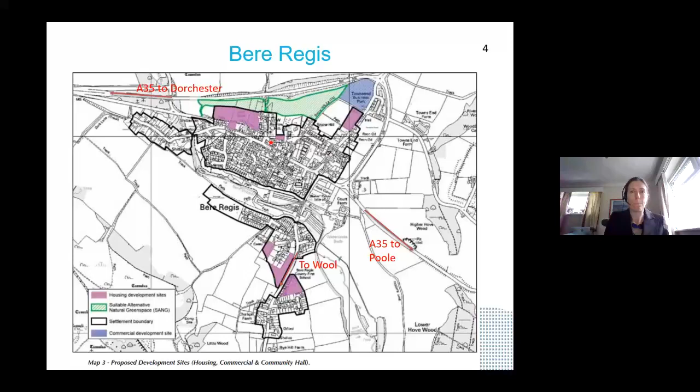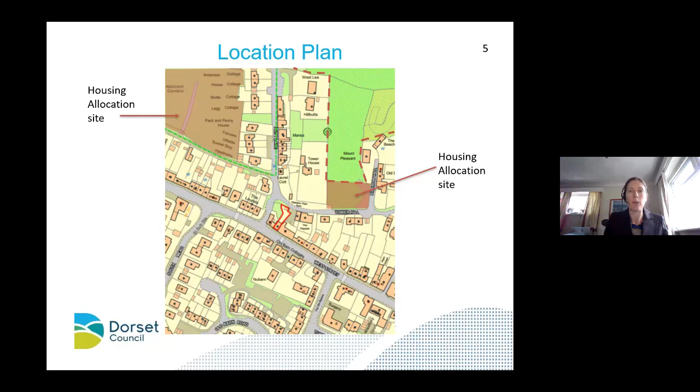On this plan, I've shown the settlement boundary with the dotted line, and the areas again allocated for housing development. Now, 6 residents and the parish council have raised objections to the proposed erection of one new dwelling at the rear of 73 West Street, on the basis that it will lead to traffic problems in combination with future housing development, the impact on living conditions of neighbouring residents, the impact on the character of the area and the conservation area within which the site falls, and drainage issues.

So we'll examine these. The existing dwelling at number 73 forms part of a terrace of housing that fronts onto West Street, but the rear garden slopes up about 3 metres to Tower Hill, where there's an existing shed outbuilding. It's proposed to replace this with a 2-storey dwelling with a single-storey appearance, achieved by creating an underground lower floor.

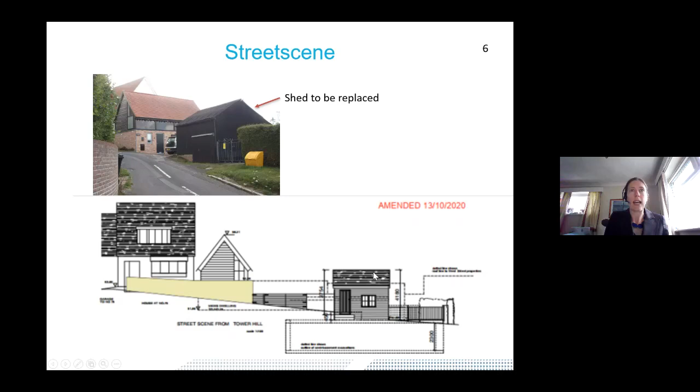So this is the street scene as proposed. The site lies within the West Street character area, identified by the Bere Regis Townscape Character Appraisal. In this area, there is an identified opportunity for infill development, provided this preserves or enhances the character of the area. Development to the rear of number 74 and 75 has set a precedent for development south of Tower Hill, and this proposal would represent a continuation of the existing residential linear arrangement.

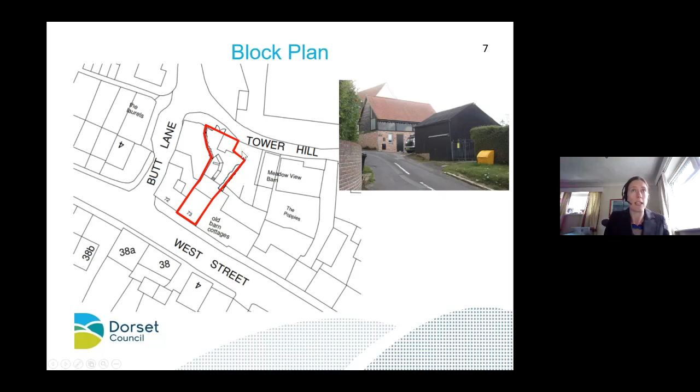It's proposed that the site is divided so that number 73 retains a terraced garden. The proposed dwelling would be modest in size and provides a 1-bedroom property at ground floor level with living space below. The underground element would stretch across the width of the site, but this would be below the level of the highway, so it would not be evident within the street scene. One parking space is proposed to serve the new property, using an existing parking space to be retained, slightly modified. It's also proposed, as far as possible, to retain the boundary hedging.

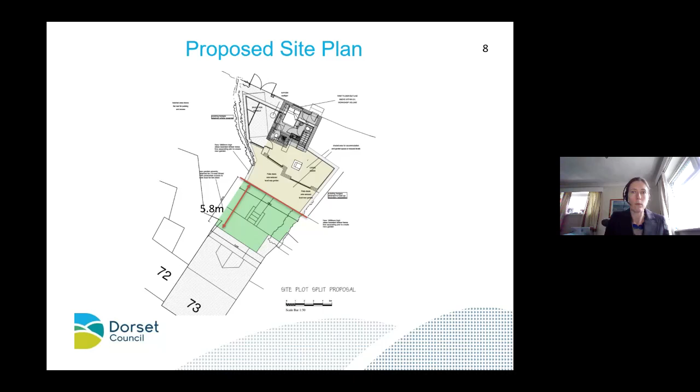Although modest, the floor area of 66 square metres is comfortably above the 58 square metres identified by the nationally described space standards for a 1-bedroom dwelling. The property will offer a bedroom and a shower room, together with an open living room, a kitchen area, a separate toilet and a utility space, plus a study office to the south served by a sun tube. Built storage space is also provided, in accordance with national space guidance.

It's noted that in the Purbeck area, the Strategic Housing Market Assessment identified a greater need for smaller properties than for larger ones. The proposal represents an efficient use of land to provide a modest dwelling.

I need to say at this point that there is, unfortunately, at paragraph 16.10 of the officer report, an error, because it suggests that the proposed ridge height would increase the height of the building by 0.5 metres above what's already there, but actually it wouldn't increase at all. The current building is 4.2 metres high and the proposed building is 4.2 metres high, as we'll see in a minute, so I apologise for that error.

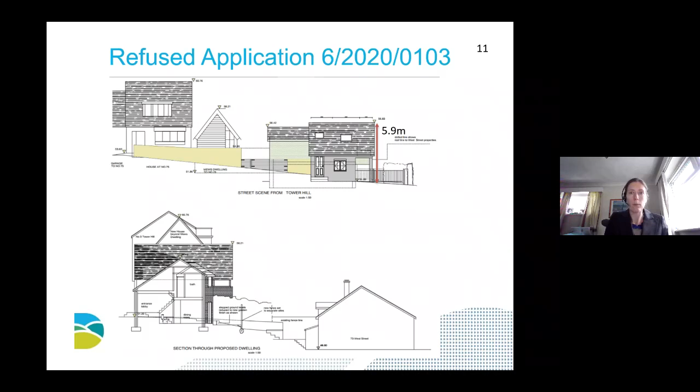So the proposed dwelling has sensitively responded to the previous reasons for refusal. The proportions of the replacement building would now follow those of the existing. As you can see, there's no windows proposed in the rear elevation. This is as would be seen from the rear of number 73, the parent property. It's equivalent to the existing relationship with the workshop, only now there's the insertion of a boundary fence to demarcate the two gardens.

Similar fencing has been used on the site to the east, where the garden's also been subdivided. The dotted line you see here is the height of the buildings on West Street. A gate and hedging would be retained, so it would in fact maintain the existing arrangement in visual terms.

There will be minimal visual impact in terms of the size of the property and the arrangement of the site from the street scene. The door design has been amended to a sort of plank door, at the request of the conservation officer, so it's more in keeping with the original function of the existing outbuilding. The design of the visible elements of the scheme are sympathetic to the location and not out of character with the area.

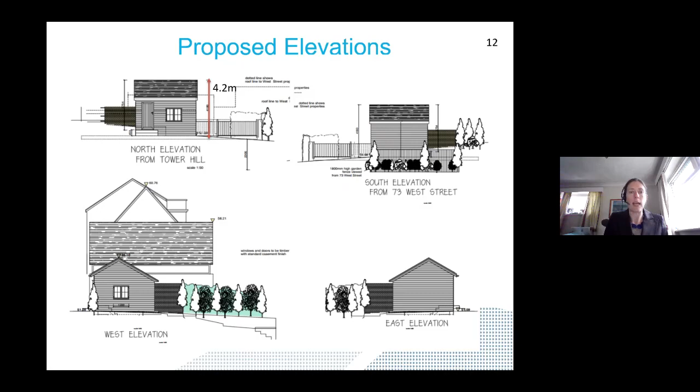As noted in the officer report, advice has been sought from the council's engineers and the building control team, and reassurance has been provided that there are no known ground stability issues in the area and construction should therefore be feasible. In these circumstances, it's not considered reasonable to require further information prior to the determination of the application.

Nevertheless, due to the hillside location, a pre-commencement condition, number 3, is proposed to secure a site investigation report into the ground conditions and an excavation plan, including monitoring by a competent person. This condition has been agreed by the applicant and will be supplemented by the requirements of the building control regulations and the Party Wall Act.

The site doesn't lie within an area of flood risk, but the building will alter the natural rate of surface water runoff. So it's judged that pre-commencement condition 5, to secure a surface water drainage strategy, is relevant and necessary. Also, due to the constrained nature of the site, it's considered necessary to secure a construction management plan, suggested as condition number 4.

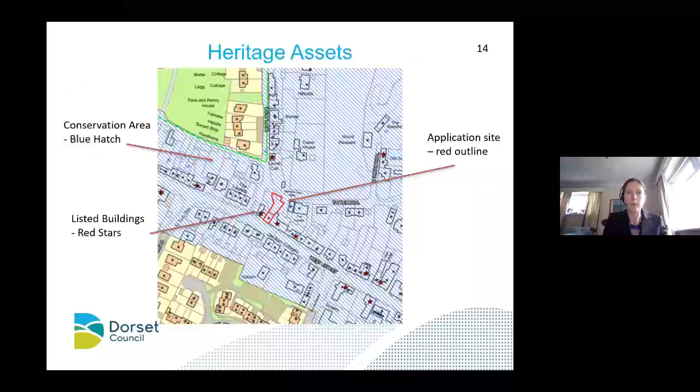The innovative nature of the proposal is considered to limit its impact on the level of harm to the conservation area and the setting of the listed building, to the level of less than substantial harm. This is the least level of harm on the spectrum within the National Planning Policy Framework, because the visual sense of space between the structures will be retained, and so will the workshop character of the building.

So the limited impact is considered to be outweighed in this case by the public benefits of providing an additional dwelling to meet local housing needs.

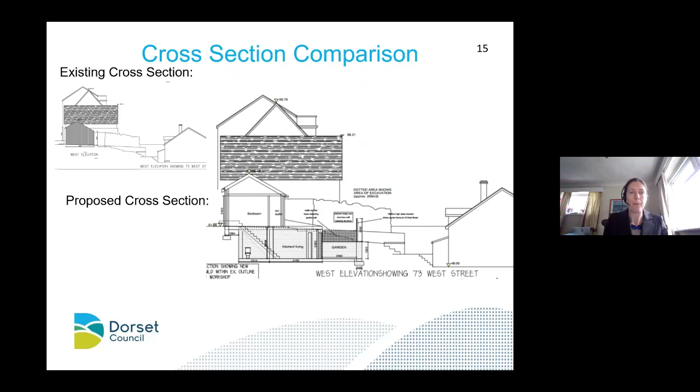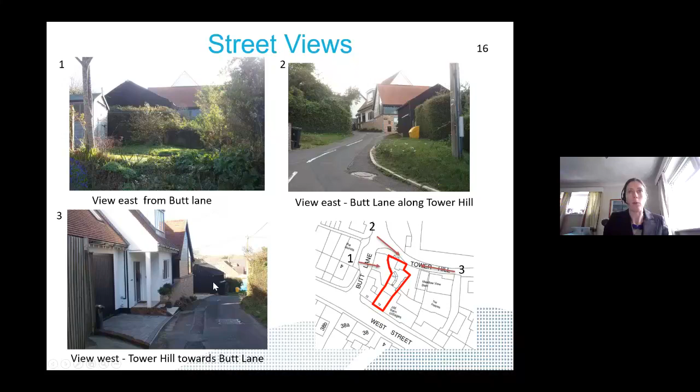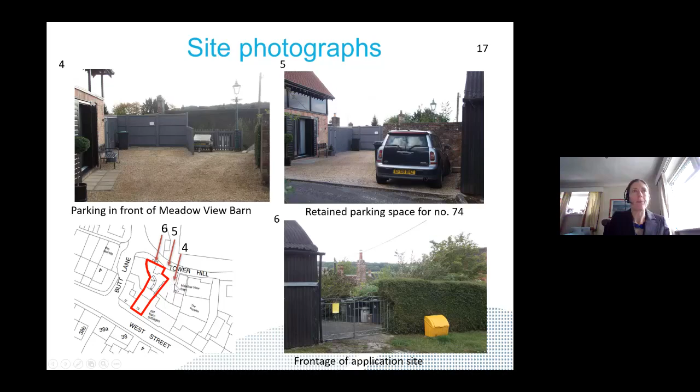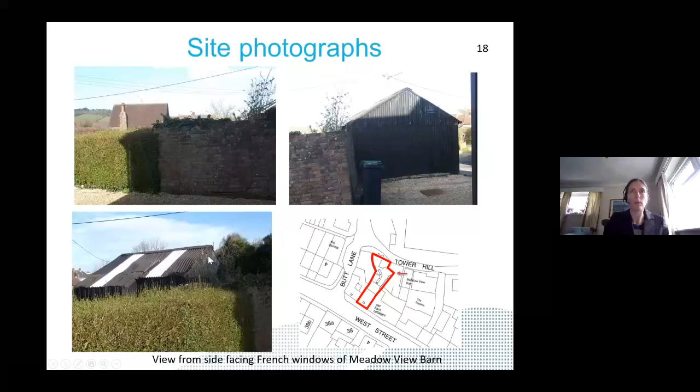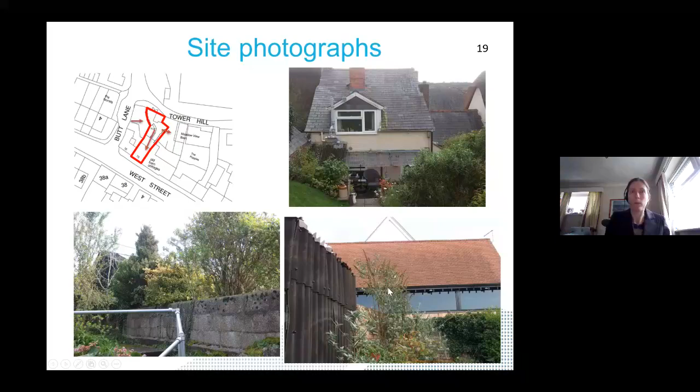Here we see the relationship between the existing dwelling and the proposed. The main difference for the occupiers will be the introduction of a 1.8 metre high fence, necessary for safety and to prevent overlooking of the new dwelling.

The proposed rear courtyard to serve the property is small, but it's considered sufficient to provide a sitting out area, and it relates well to the new living area through large glazed doors.

As explained in the officer report, the site has easy access to public rights of way and open countryside, so the size of the amenity space is not considered to result in harm to the amenity of future occupiers so as to justify refusal. Officers did raise concerns during the application about light levels, and therefore the applicants have provided

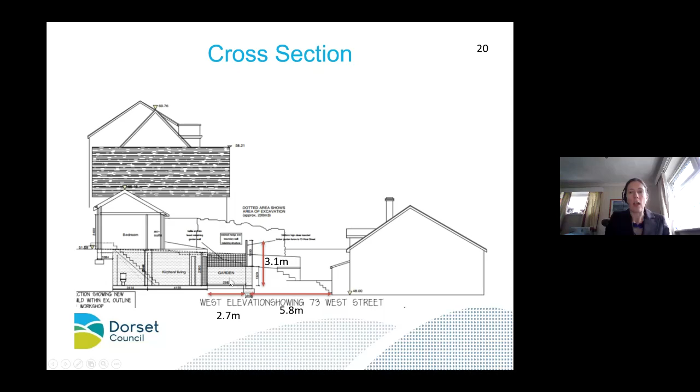a solar study. This study shows that adequate daylight will be afforded to the property all year round for habitable purposes, and direct sunlight will be provided for all but 6 to 8 weeks of the year.

So in the depths of winter, you wouldn't get direct sunlight, but that is the case for any north-facing window or other property. For instance, they looked at the similar relationship with the front of the northern aspect of the West Street properties, and again you wouldn't get direct sunlight into those rooms, but there's still sufficient daylight as to render them habitable.

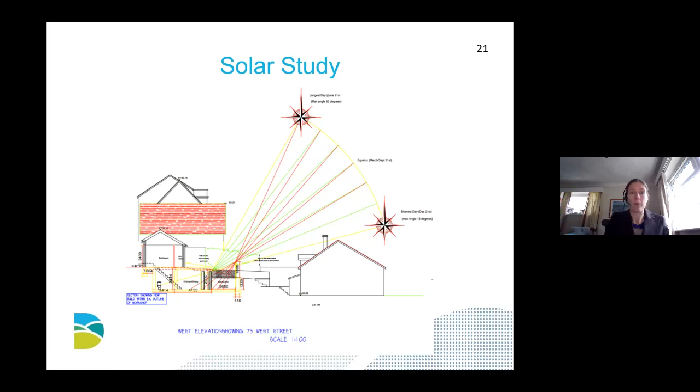This is a close-up. This talks about how the fence could be reduced, and that would increase daylight entry, but this is not considered necessary to require in order to create acceptable daylight entry into the south-facing site.

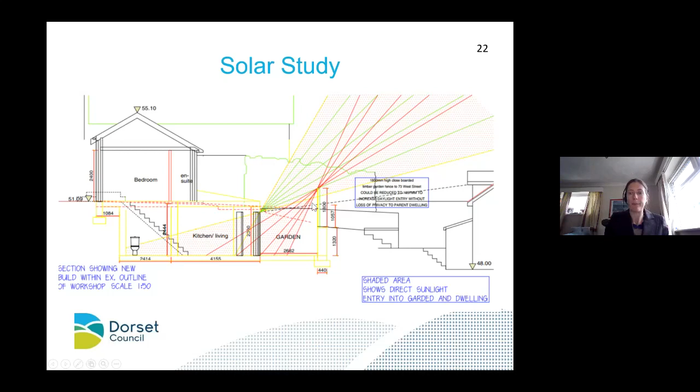Moving on to parking, concerns have been raised about the impact on parking in the vicinity. The proposal will retain the existing parking space belonging to 73, but that will be for the new property, so this will displace one parking space onto the street.

in front of the dwelling. The site is in a sustainable location, which is served by buses, and therefore it's not considered reasonable to refuse permission on the basis of insufficient parking, although it's below that which would usually be suggested by the guidance.

The occupants of number 73 have the right to utilise a rear access belonging to 72 through to Butt Lane, so they would be able to continue to wheel their bins onto the highway for collection.

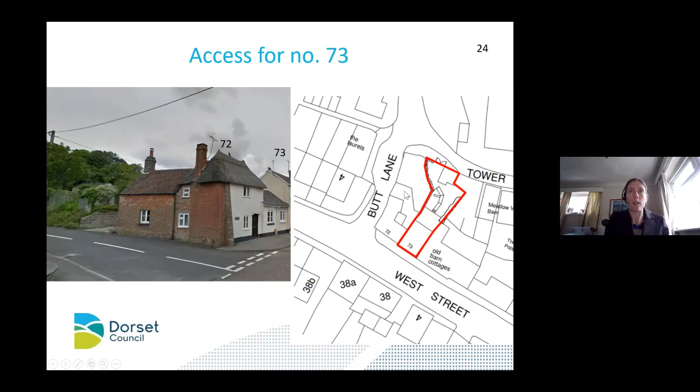In summary, the proposal is found to accord with national and local planning policies subject to conditions. In addition to those already mentioned, these are proposed to secure landscaping details, materials, details of the fenestration, the provision of the parking space, and the removal of permitted development rights for additional extensions in the future.

This is a new one-bedroom dwelling proposed in a sustainable location. It's carefully designed to minimise the impacts on character and appearance of the area, where less than substantial harm to heritage assets is outweighed by the public benefit of additional housing provision. For all these reasons, your officer recommendation is one of approval, subject to those conditions.

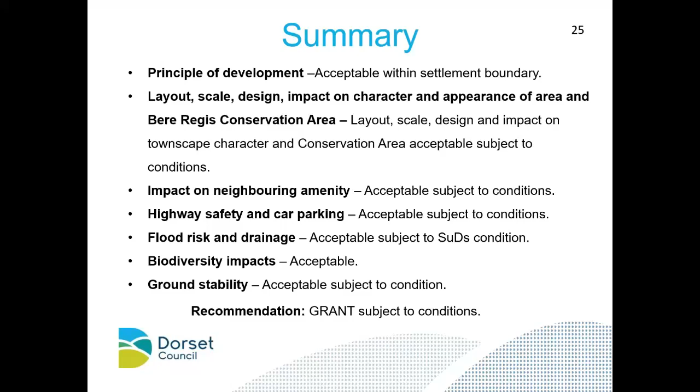The only thing I would add at this stage is that it's my understanding that the curtilage, the rear garden, the rear part of the property could be severed, because the parking isn't conditioned. And if it was severed, it could then be sold off for application later on. I might be incorrect on that, but perhaps the planning officer can confirm.

Liz, would you like to respond to that, please? Thank you, Chair. Yes, Colin is correct that there is no condition requiring retention of the parking space for number 73. Thank you.

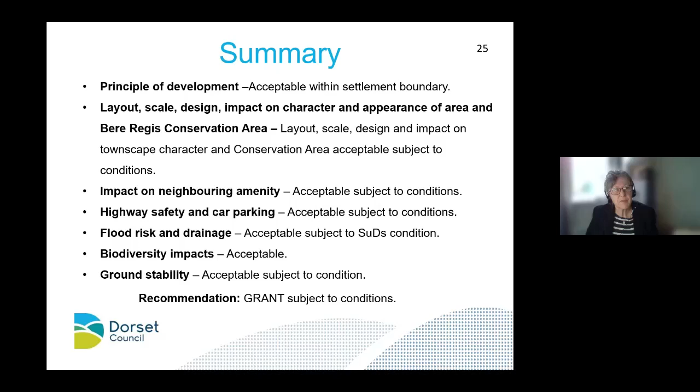Would you like to take us through it, please? Yeah, the first one is from Jackie Ahern.

We would like to object to this application for the following reasons. It is not included in the Bere Regis neighbourhood plan. The Bere Regis neighbourhood plan was extensively consulted on in 2019 and a village referendum was held. The plan was approved, and we believe that in June 2019, Dorset Council released a press release congratulating Bere Regis on its neighbourhood plan. The plan allows for 105 new houses to be built in Bere Regis, the location for these being set out in the plan.

The neighbourhood plan allows for 2-3 houses to be built a little bit further up Tower Hill. So if they go ahead and this application is granted, there could be a significant increase in traffic in this conservation area. The revised plans for 73 West Street now put the bulk of the proposed development underground, but there is no reference to any structural engineering survey to indicate that this is safe.

Is there any chance of causing subsidence to adjacent properties and gardens? Is there a risk to local water supplies and drainage? Is there a risk of land slippage? We do, however, note that any grant of planning permission will be subject to ground surveys, etc.

The application makes no reference to the impact on our property, Woodbury Cottage, 74 West Street, Bere Regis. Woodbury Cottage has access to Tower Hill via the back of the property, where there is 2 off-road parking spaces, one of them directly adjacent to the proposed new dwelling. Meadowview Barn has 1 off-road parking space. It is difficult to imagine how the proposed dwelling can be constructed without intrusion onto land belonging to Woodbury Cottage. One of our off-road parking spaces is directly adjacent to the existing black workshop.

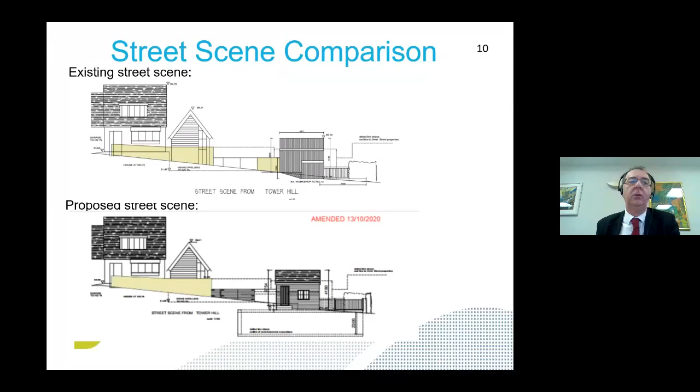Thank you, Madam Chairman. Yeah, it's probably outside of the remit of the planning committee, and I understand it might be a building control matter, but I have some reservations when it comes to putting in piling. I know it was mentioned in the officer's report that this piling is low impact. However, any piling does create vibration and that sort of thing. I'm just concerned about piling activity in close proximity to other properties causing shock waves through the ground that could damage adjacent properties. As I say, that might be outside of our remit and it might be more building control, but I just feel I wanted to highlight that might be an issue. Thank you.

Okay, Liz, do we know if they are going to be power driven or core drilled? The contiguous piling involves, I think there's two options, aren't there? I made a note, this is not my speciality.

They cast concrete piles. They either use a rotary bored system, apparently, or a continuous flight auger technique. So it's not the sort of traditional piling that you might anticipate. I'm sorry that we're straying into areas covered by the building control regulations. It means that as an officer, the only advice I can provide is that the proposed form of piling is one anticipated to be less intrusive than others might be, and that this is the form of piling that has been used very effectively in very constrained locations, particularly in London, where they're doing a lot of work in tight spaces. So although this is an unusual suggestion in Dorset, it's not an unusual form of development in the country as a whole, and it is a matter that will be covered by several areas of legislation intended to minimise the negative impacts on surrounding development. From a planning perspective, the main point is that there are ways of building it, and how it is ultimately built will be up to the developer under the legislation covered by building control. I hope that answers that question.

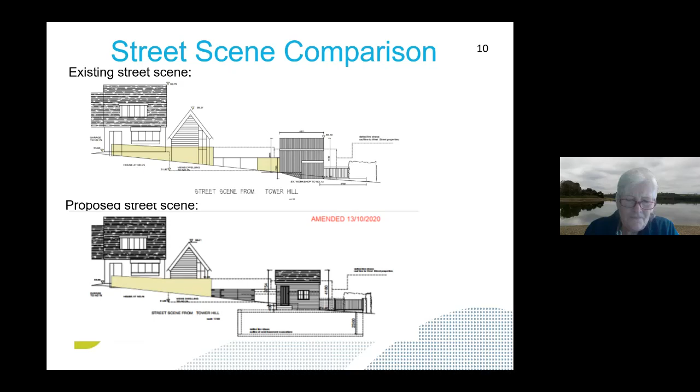I think I see this as a very ingenious and creative response to the previous reasons for refusal of the earlier application.

Building in this way, making a large excavation, is actually very common in London. There are ways of doing it. People are building vast basements all the time. And I can't believe that it's not possible to solve the problems. Okay, if there'd been obvious problems with water or whatever to begin with, then that would be reasons for a lot more caution. But I'm sure it's possible to do so, and I think it ill behoves us to refuse something just because it's unusual or a bit difficult or creative in engineering terms.

From the point of view of the area as a whole, as it happens, I know that little bit of Bere Regis rather well because my wife's mother used to live there some years ago, so I've got a good appreciation of the street scene and what it feels like. It does seem to me that a real effort has been made to do something appropriate for that area, and it's not as if what is there at the moment is something of great merit. It seems to me this will be an improvement from the point of view of what that area looks like.

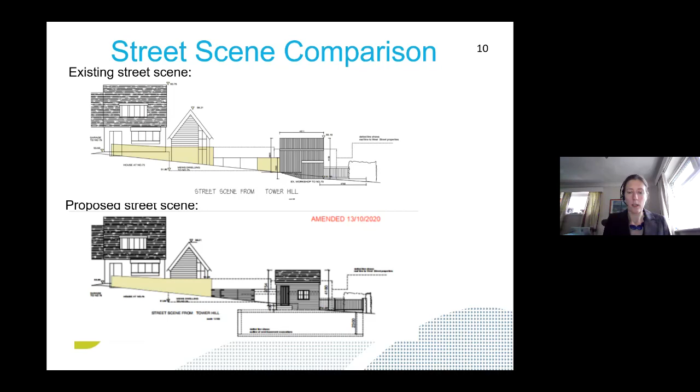Okay, thank you. Is that all the points you wish to make at this time, David? I think yes. My main concern is that in all these decisions, we need to be applying great weight to recently made neighbourhood plans, and anything that seeks to get in between the structure of a neighbourhood plan needs to be fairly strongly based.

I'm a little ambivalent as to the benefits of this, but I accept what the officers are saying. Thanks, Chair. Okay, thank you.

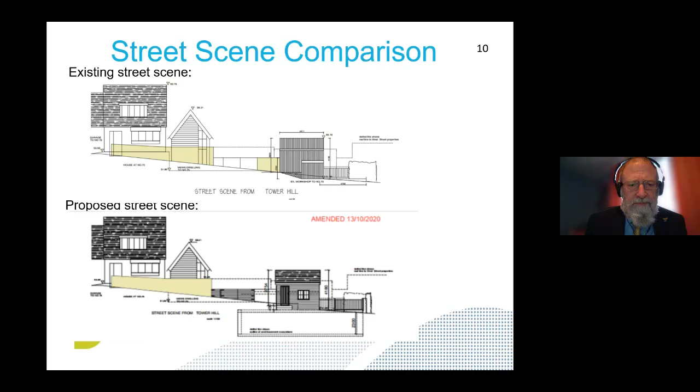I shall move on then to my next speaker, and that's Robin Cook. Thank you, Madam Chairman.

I think the designer of this deserves certainly 10 out of 10 for ingenuity, and we're always encouraged to make best use of space for development. I think you can say that is definitely the case here. I don't see any great criticism coming through anywhere in the reports about the appearance of what we see in the slide on the screen there.

I think what it's replacing looks a lot better. It's no bigger really, but it looks a lot tidier. So I think it's difficult to make any criticism there. The main concerns are, if not in any particular order, about the car parking issue and about the construction issue.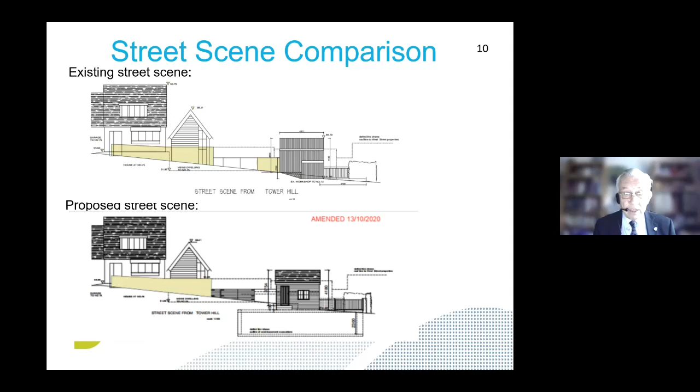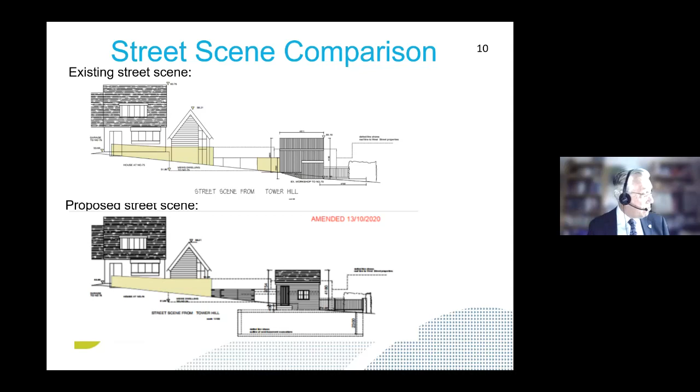But I'm a little bit more worried about the amenity for the future residents. There's some detail in section 16 with the sunlight report and so on. I would disagree with the officer where in 16.26 the officers consider that the level of daylight provided to future occupiers, even on the shortest day of the year, 6 to 8 weeks either side, will be sufficient for habitable purposes. Well, I wouldn't tend to agree with that entirely.

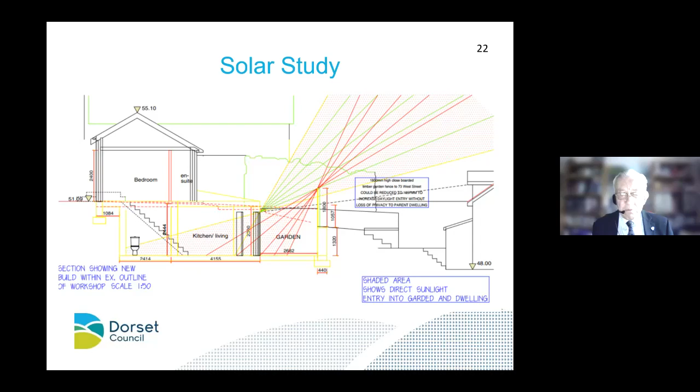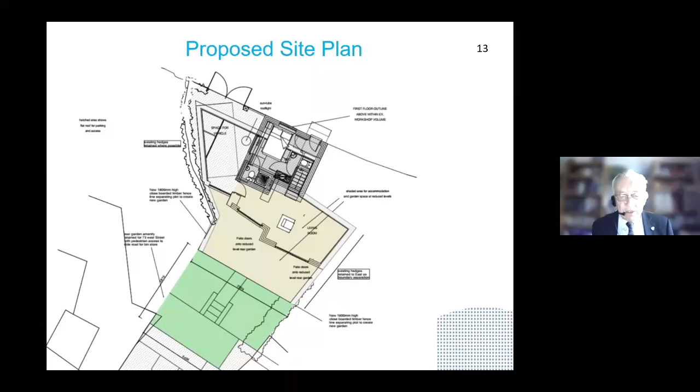I think it's going to be quite overbearing when you're down at that lower level. And when we saw the floor plan, from memory, I don't know the slide number, I do apologise, but there was a floor plan quite early on. Yeah, I think there was an earlier one that showed a sort of — that's it. This is presumably where the patio doors etc. are. You've got quite a long area away from there, a study office without any access to main light that I can see, other than possibly there.

So I wouldn't mind that fencing to be lower. I think you said, through you Chairman, Liz, that it could be lowered to allow more light in, because I'm worried about the future amenity. And take a day like today — I don't know where you are, but in Wimborne it's pretty black out there now, and we're struggling to bring light into our house without putting lights on. So I think it would be quite depressing in some respects, but it's a clever use of the space.

And if we can get over those issues like car parking and where visitors are going to park, because that little bit of lane behind there is quite narrow. We went on the site visit there, I think, at the beginning of this year. Remember, that lane is quite narrow with hedging on one side and the properties on the other. So where are the visitors going to park? But otherwise, I'm reasonably happy with it, other than the daylight conditions. Thank you.

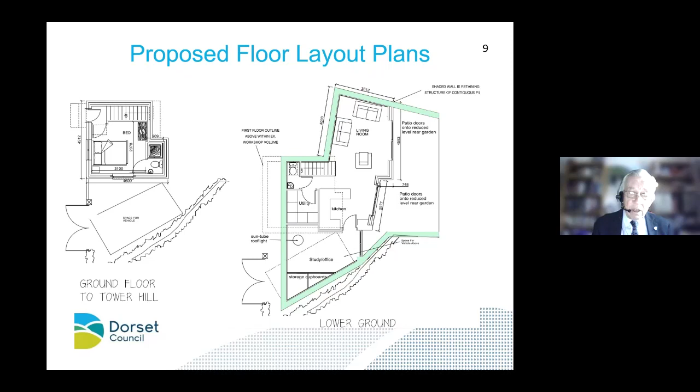Okay, thank you. Shane Bartlett, you wanted to come back? Yes, thank you, Madam Chairman. Similar considerations that Councillor Cook was just expressing, but from a slightly different direction.

We have set ourselves as being an authority that is going to concentrate on good planning and good design. And I don't disagree that this is, in terms of a design and trying to accommodate a dwelling on this site, is innovative. I think the architects have had a field day with it. I think they've come up with a design that on paper looks great.

But I think section 15.0 on page 25 of the officer's report starts by saying, in accordance with the council's responsibilities for promoting health and well-being, a reduction of health inequalities across the county, the potential impact of the proposal on general health and well-being has been considered. And the report ends with, in considering this application, regard has been given to the future well-being and health of the local population within the scope of the material planning considerations applicable to this application in the realms of planning legislation. I think that's all well and good, but I'm also of a view that any future resident living in this property.

Let's face it, effectively they're going to be living in a bunker because there is only the bedroom that is above ground, the entire rest of the living space is below ground. And I would have thought that to the average person, that is going to be detrimental to their health and well-being going into the future. I can't imagine that most people would actually willingly expect to spend a significant amount of time in a living space like this.

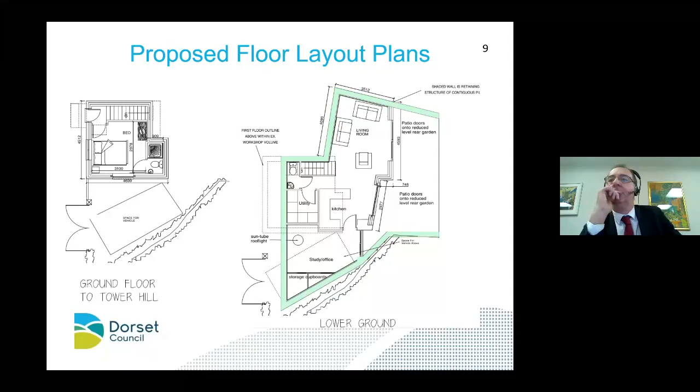I've listened to the debate quite carefully, and it seems to me that although many members have got reservations about this, none of them stack up to a reason for refusal. They're all opinions which are relevant, but not strong enough to come up with a reason to refuse. Nobody has actually done that throughout the debate, or made any indication they're thinking about a reason for approval or refusal.

I've listened to the debate and Councillor Heatley summed it up quite well, in my opinion, and I'm not going to go through everything he said because I totally agree with it. I think that on balance, this one should be approved.

The only reservation I've really got is the comment from Highways about the possibility of selling off the car parking space. So I think if we had a condition that would prevent that, that would be a good thing. Even if that condition wasn't in there, I'd still be minded to approve it. So I'm going to move approval, Chairman.

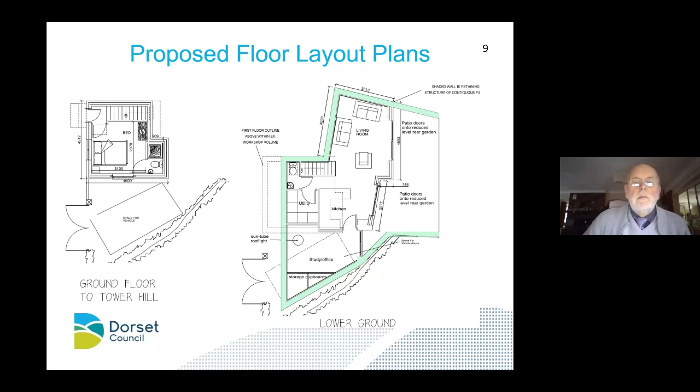You're on mute. You're on mute, Chairman. Sorry, trying to do too many things at once.

John, you said you're happy to second the proposal to grant. Is there anything you wish to add to support your seconding? No, I just agree with Councillor Dyer's summing up. There were no material planning reasons to refuse this, so on that basis I'm quite happy to second it.

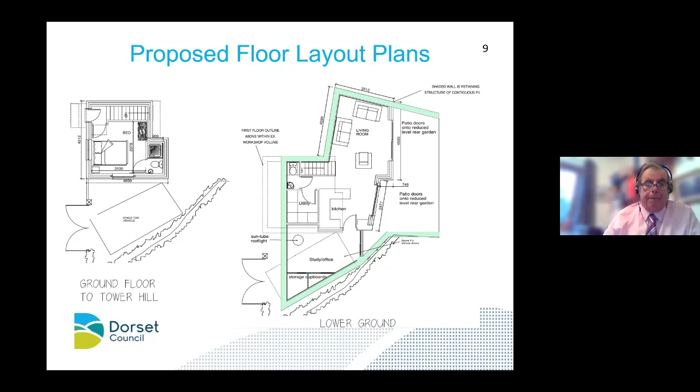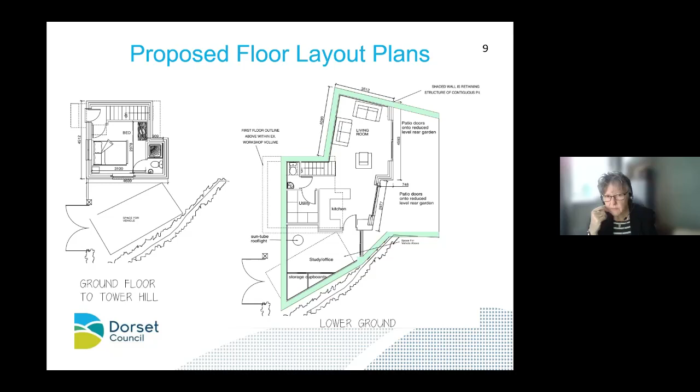Okay, thank you, I'm going back now to Alex Brenton. Thank you, Chair, it's a point of information really. Looking again at page 9, the proposed floor layout plans for the downstairs, the bunker part of the building — how are they going to excavate the top half, the living room area, without destroying the parking space outside on the road, which is the neighbours'? It seems to me they've basically got to dig up the neighbour's parking space, dig the hole, then reinstate it. This does seriously affect the well-being of neighbours in the process, and therefore has to be detrimental to the street scene and to the neighbours' health and well-being, whatever the phrases we use these days. How are they going to do it?

Liz, do you want to respond to that, please? Thank you, Chair. So the parking space is adjoining the existing workshop, and in order to construct it, they're going to have to demolish the existing workshop, excavate the land and build it. I showed you earlier the picture of the contiguous piling which would go in along here.

The need to go over or do any works on the neighbouring land is a matter covered by the Party Wall Act, so they would need to enter into an agreement with whoever owns that land. Other than that, it's not a planning consideration. During construction there's disruption, traffic movements, activities that wouldn't normally occur on a residential site, but this is for a short duration to enable the development to be constructed, just the same as any other development.

So I can't see that, although I fully appreciate that the parking space issue is one that will have to be discussed with the neighbour who owns the land. It's not a matter on which a planning decision would be made. It's not a material consideration in this instance.

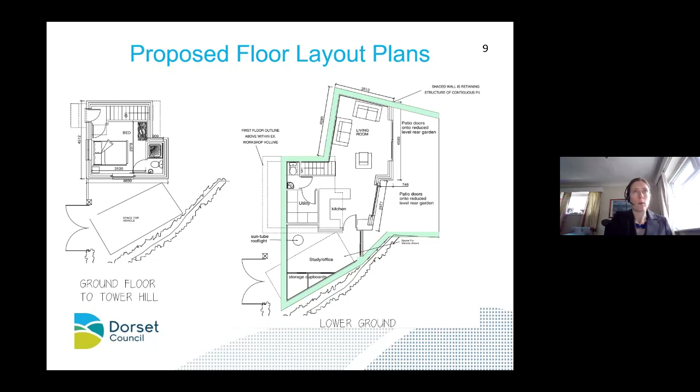Thank you. I think I would add to that the photograph that Liz put up earlier of the piling and the retaining wall. From memory, when I've seen it shown on various programmes, the piling goes in first, and once that's set, they excavate the ground behind it. So you don't dig the land away and then put the piling in - you put the piling in and then expose it through the excavation, so that way they are protecting the neighbour's land.

But I agree that there would have to be some sort of neighbour negotiation through the construction management, and that's outside of our remit today. Alex, are you happy with the responses?

Sorry, I understand, I'm just baffled as to how this can happen without very, very serious disruption in the whole area. I know that happens with everything, but there's no runoff area for your JCBs and such like. So I am very concerned.

Thank you. And my last speaker is Shane Bartlett. Thank you, Madam Chairman. Councillor Dyer got in before me for a proposal on this. I was going to propose a refusal on the grounds of - and I might need some help from the officers - as to whether it's a significant reason.

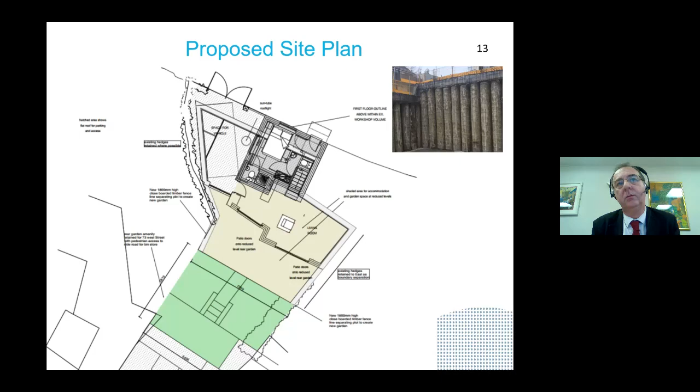I think from an officer's point of view, the fact that it's contrived is only an issue if it results in harm. So I'd say that the harm you've identified would be the impact on amenity for future users as a result of limited outlook and overbearing impact of that boundary around the subterranean garden, I suppose. So you'd be arguing that the design didn't provide the high standard of amenity that would be expected? Yeah, I think that would be - that's my understanding of your position. Yeah.

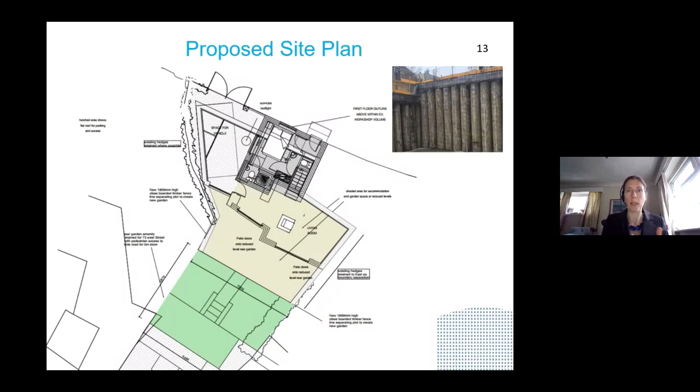So that is a position that you could choose to hold. Officers have obviously considered the issue of amenity, and although it is tight, and although the boundary screening is sort of suboptimal - you wouldn't really want it that high in an ideal circumstance - officers consider that overall that wouldn't be sufficiently harmful to warrant refusal, but that's an officer opinion. Okay, thank you. That's why we get these balanced decisions coming into committee, because they are tricky.

So we have a proposal to grant, and I just want to double check - so we were talking about a condition about not being able to subdivide the plot any further, so that the parking is retained, and we've had that confirmed, it is already in the existing proposed conditions. So it's been proposed by Mike Dyer and seconded by John Worth.

I will now go through the roll call and take the vote. So Shane Bartlett. I've listened to the officer's report and I've listened to the debate in full and understand the application proposal before us, and I vote against. Okay, Alex Brenton.

Thank you, I have listened all the way through this, and I understand the site and I understand the conditions, but I still vote against. Okay, Robin Cook. Thank you, Madam Chairman. I've listened to the presentation and the full debate, and I support grant. Okay, thank you, Mike Dyer. I've been present throughout, listened to the debate and all the presentations, and I vote to approve grant.

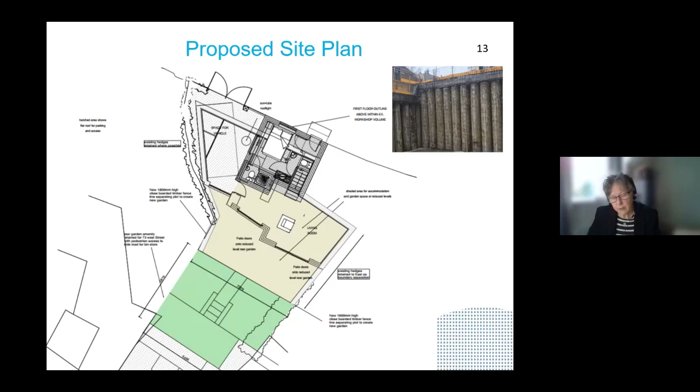Okay, thank you. So, David Northover, can you just confirm the outcome of the vote, please? As Chairman, the outcome is 7 for, 2 against. Okay. In that case, the application is granted. Thank you all very much for a very interesting and detailed debate on that application.

Okay, I'm going to move on now to our next application, and that is agenda item 5B. Change of use, added use of family centre into residential facility and office space at Hazelwood County First School, Colehill, and that's pages 45 to 56 on your agenda. And taking us through that one is Katie Lomax.

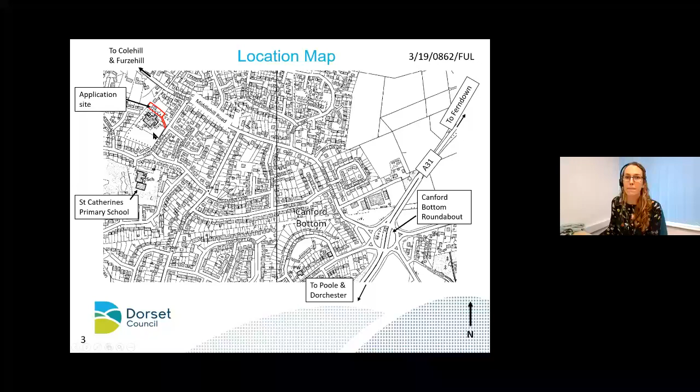Immediately to the north of the site is a dwelling at number 88 Middlehill Road, and number 8 Cutler's Place lies just here to the east, with Hazelwood First School to the south. The vehicular access runs through the school gates and the car park. The site is occupied by a detached bungalow which is elevated above the school due to changes in land levels. There's an enclosed area of garden to the east and 4 car parking spaces to the west.

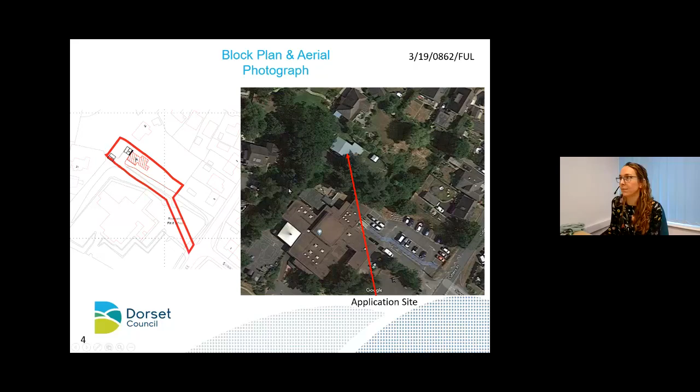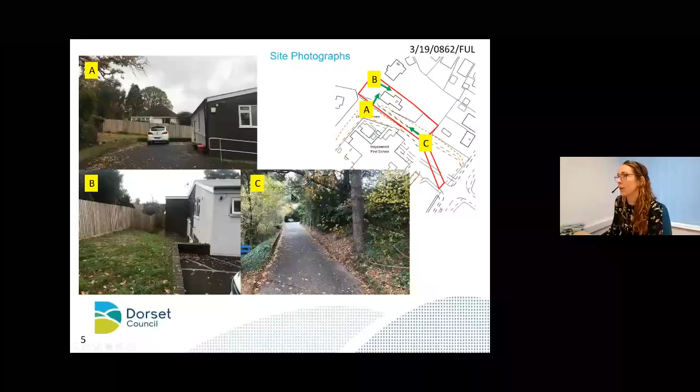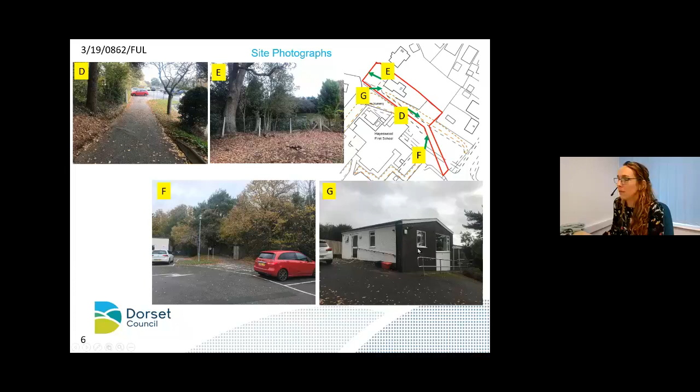View D is the opposing view. It's taken from the access looking down into the school car park. View E is off the site boundary to the northwest. View F is from the school car park looking at the access track which leads up towards the bungalow. And view G is the front elevation and side elevation of the bungalow itself.

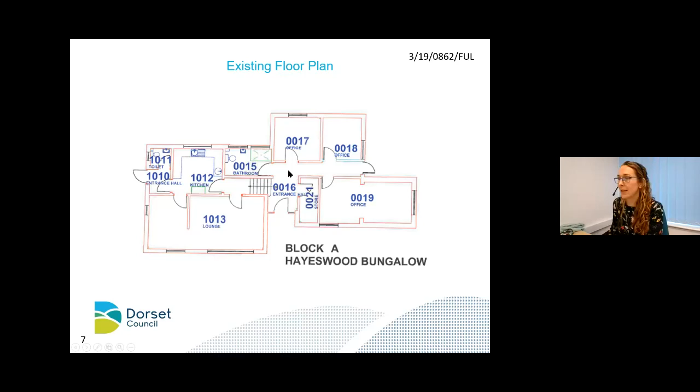Here we have the existing floor plans which show the current layout of the bungalow with 3 offices alongside the existing lounge, kitchen and bathroom facilities. And here we have the proposed plan. The proposal is for the conversion of 2 of the offices into separate bedrooms and for a flexible office with staff sleeping arrangement for occasional use. The existing kitchen, lounge and bathroom facilities are retained. No external changes are proposed at all.

The application's been submitted by Dorset Council as part of the Council's plan to improve facilities for residential care within the county, and will be used to provide long-term residential care for looked after children who are subject to care plans. The period of residence could vary from several months to several years depending on individual care plans. The office space is retained so that staff on shift have appropriate facilities, and it also provides the option to use the bungalow as an outreach centre in the future, should the residential use no longer be required.

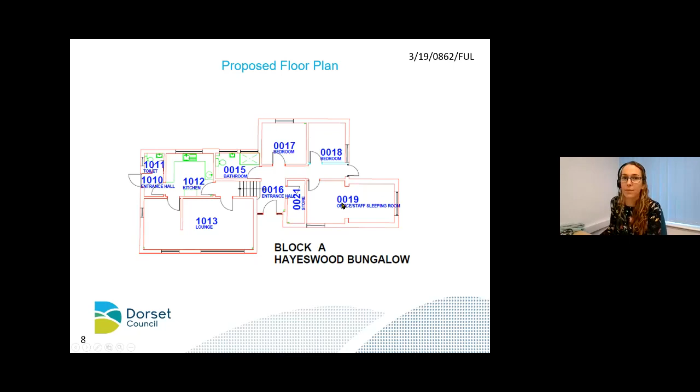So the main considerations, as outlined in the report, include the principle of development. As the site is located within the urban area of Colehill, the proposed change of use involving the introduction of a C3 use alongside and retaining the existing D1 use is considered acceptable in principle, subject to other policies and considerations. The impact on the character of the area has also been considered.

The next consideration is neighbouring amenity. As previously mentioned, the site is located in a residential area. The nearest neighbour is number 88 Middlehill Road, which is approximately 10.5 metres to the north, with the intervening boundary fence, as shown in the photo.

The distance between the properties remains the same. There's no change in the relationship of the bungalow to its neighbours, and the separation distance is considered appropriate and is not unusual in the context of the area.

The change of use of 2 of the offices into bedrooms will facilitate the occupation of the building by 1 child and 2, occasionally 3, members of staff at any one time. The staff here work in shifts from 11 AM until 11:30 AM the following day.

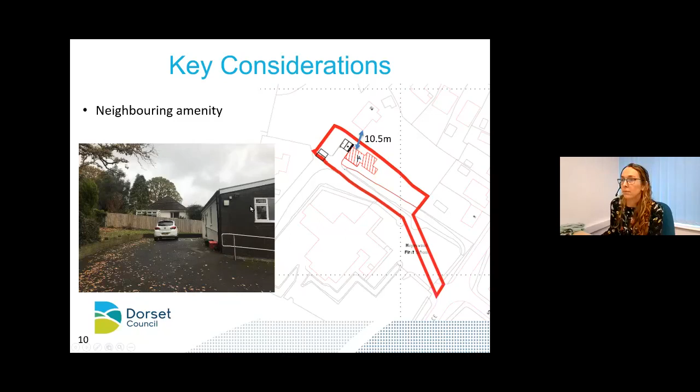The rear of the site backs onto an area of protected trees, and the access also runs through a much larger TPO area. Because there's no physical change that is proposed, the tree officers considered the proposal and it'll have no harmful impacts on any of the nearby protected trees. It's therefore considered acceptable in this regard.

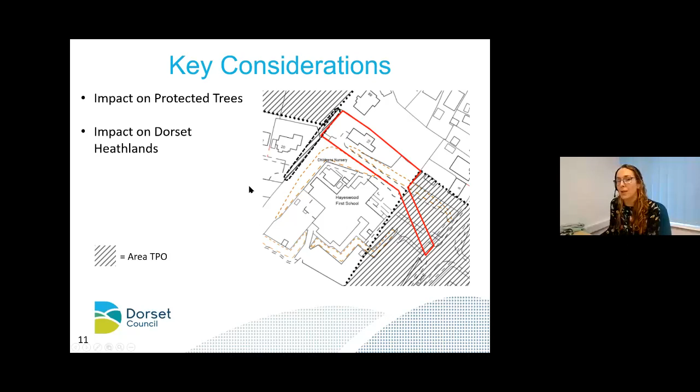The site is also located between 400 metres and 5km of a protected heathland and proposes a net increase in 1 residential unit. The council is satisfied that the mitigation required, as set out in the Dorset Heathlands SPD, will be secured so that the development will not result in harm to the integrity of protected habitat sites, and the proposal therefore accords with policy ME2 of the core strategy.

The final consideration is the impact on highway safety and car parking. The site has 4 existing car parking spaces, including 1 disabled space, and no changes to this are proposed. The maximum residential occupation is proposed to be 1 child and at times 3 members of staff. The on-site car parking is adequate for these purposes and exceeds the council guidelines for a 3-bedroom house.

Any additional staff or visitors would be able to park in the residential roads in the local vicinity. Should the residential use no longer be required, the D1 use would have a similar impact on parking as the existing use, and the council's highways officer considers the current provision acceptable for the proposed D1 use. So with sufficient car parking and no highway safety considerations, the proposal is also acceptable in this regard.

So in summary, the principle of the development is acceptable in the urban location. The impact on the neighbouring amenity is also considered acceptable. The impact on the street scene is acceptable as there's no material change. There's no harmful impact on the protected trees, and there is considered to be sufficient car parking to serve the proposed change of use. The proposal is found to accord with the relevant local and national planning policies, and the recommendation is therefore to grant, subject to conditions as detailed in the officer's report, which is on pages 45 to 54 of today's agenda.

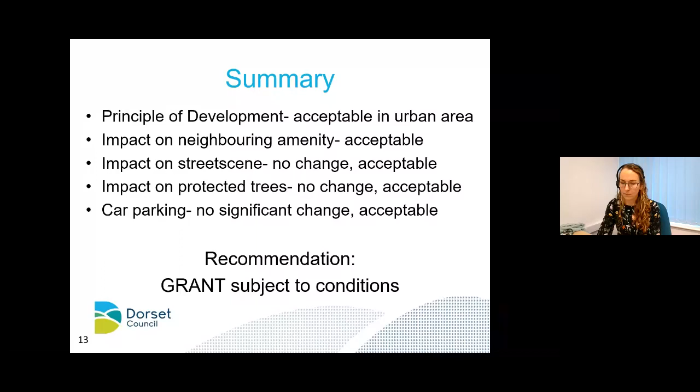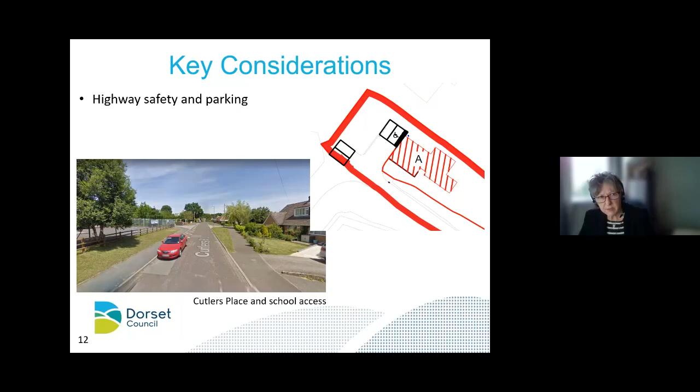Thank you very much. I understand that one of the local members who is not on the committee is in attendance to this meeting, and that's Janet Dover. Janet, would you like to speak to committee on this one? Seemingly, Councillor Dover, although she had accepted my invitation to this meeting, she seemingly has chosen not to wish to speak on this item. Thank you. Okay, that's fine. I was aware that she was in the meeting, so I wanted to give her the opportunity.

Okay, I'm now going to move then straight on to the member debate. And my first speaker will be Robin Cook. Thank you very much, Madam Chairman. I think there's a lot of support for this. It's badly needed, and I'm just going to move acceptance. Thank you.

Thank you very much. David Tooth, you're the next speaker. Do you wish? The floor is yours. I simply want to second Robin's proposal. I think this is an excellent idea and fully support it.

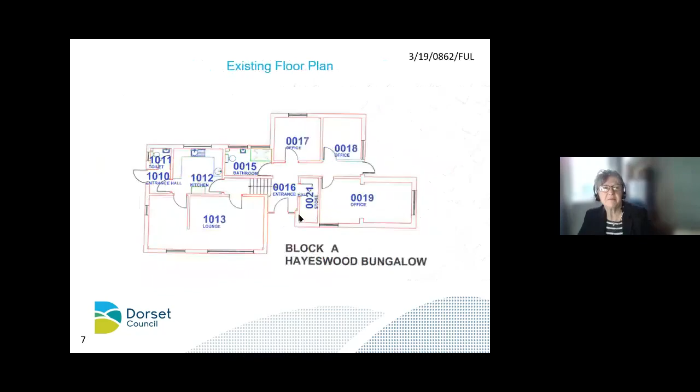Thank you. Shane, you're my next speaker. Thank you, Madam Chairman. Yeah, I just wanted to say that obviously this is a great opportunity for residential and permanent childcare for looked after children within the county. There is a shortage of this type of facility within the county. It has virtually no impact on the local community, and I fully support it. Thank you. Thank you.

Okay, I have no further speakers, so I'm going to put it straight to the vote. It has been proposed and duly seconded for grant. I will now go through the roll call.

Shane Bartlett. Thank you, Madam Chairman. I've listened to the officer's report and I've listened to the debate and understood the application proposal before us, and I vote to approve. Thank you.

Alex Brenton. Thank you, Chairman. I have listened to the presentation and I am fully in favour of this application.

Thank you. Robin Cook. Thank you, Madam Chairman. I've listened to the debate and the presentation, everything connected with it, and I support approval.

Thank you. Mike Dyer. Where are you, Mike? Sorry, say it again. Present throughout, heard the presentation, vote for approval.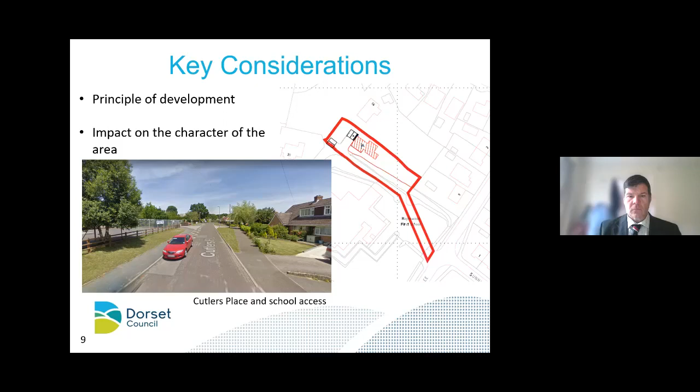I will say, just finally, in a previous incarnation, I chaired the Corporate Parenting Board and did visit this site. And I know that this is part of the move to reduce our out-of-county expenditure. So I'm really pleased that members have supported it. As you can see, I did not take part in the vote on that.

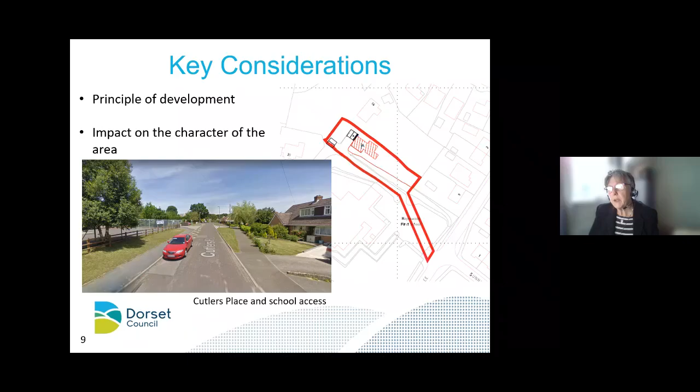Okay, so item 5C has been deferred. So moving on to item 6, and that is urgent items. Members will be pleased to know that there are none this time. We also do not have at this stage any appeal outcomes to be reported to committee, but obviously we will do so again in the future when that becomes apparent.